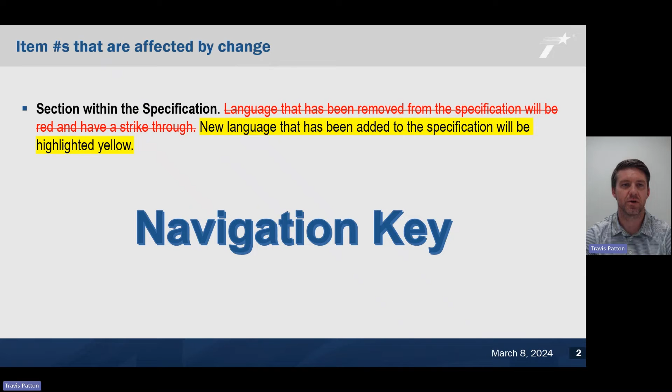So anytime during this presentation or during your plan review, if you need to go back and look at this, refer back to this navigation key if you're unsure what each of those stands for.

So to get started, item 341, 344, 346, and 347, as noted at the top. You'll notice in the fine aggregates table, the first thing I'll point out is organic impurities has been added to this table. This is not a new addition; it's something that's been listed under the fine aggregates portion in the paragraph directly above this.

Industry did ask in our conversations that we just add it to the table for quick reference. Do note that this is an optional test, so nothing has changed. We've simply added it to the table to make it easy to reference.

One change we did make, if you can see over here, there's a footnote 3 on sand equivalent. We've done this to add an optional methylene blue test.

The reason we've done this: historically we had the sand equivalent on the combined fine aggregate, and we didn't have as many materials failing. However, in the special specifications we're currently under, we changed the specification such that we run the sand equivalent on individual fine aggregates. What that resulted in is you no longer have this dilution effect between different amounts of material, and so we've seen some materials fail.

A really good example of this: there's a really good Class A material here in Central Texas that we were not able to use because it failed sand equivalent, which is an indication meaning that it's dirty. However, when we ran methylene blue, it came out to a methylene blue value of 2, which would mean the fine particles causing it to fail sand equivalent were in fact not reactive, meaning they're not clay. So we still feel this is a benefit to use this material.

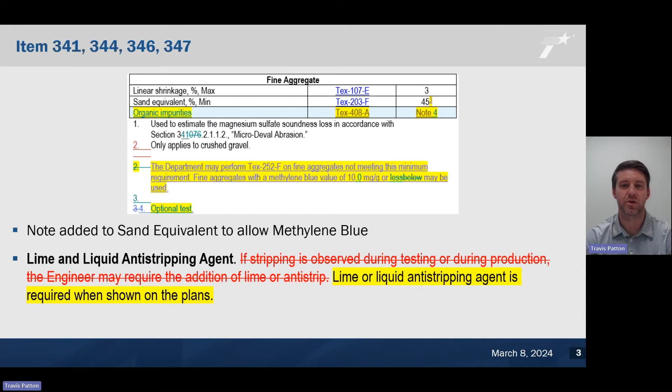So if you're in a district that routinely sees stripping, or you like the requirement of requiring lime, put that on your plans up front so the industry knows how to bid for the project. That way you ensure you also get the lime or liquid anti-strip.

If you don't pay attention to any other slides, I would say this slide and the next slide are probably the most important. It doesn't look like a lot of changes, but I'll explain why this change is going to be very impactful if you're not paying attention.

This will apply to item 341, 344, and 346. It says surface, intermediate, and base mixes referenced in Table 4 and 5 are defined as follows. That was the existing language. We have added 'unless otherwise shown on the plans.' The reason we've done this is we have changed the surface definition, which will impact your recycled amounts and your binder grade substitution. So you can write on the plans to define surface, intermediate, and base differently than what you see here, or you can write in your general notes exactly the amount of recycle or no binder grade substitution.

That is also allowable. Under surface definition, you'll notice it says the final HMA lift placed at the top of the pavement structure. Historically, it said 'or placed directly below mixtures produced in accordance with,' and that's seal coat, PFC, TOM, and thin bonded. The original intent with that language was that those four materials are not added for structural purposes. They're very, very thin, and a few of them are even permeable. So that layer directly below them is still experiencing very high stresses, very high strains, and they also are potentially still interacting with the environment above.

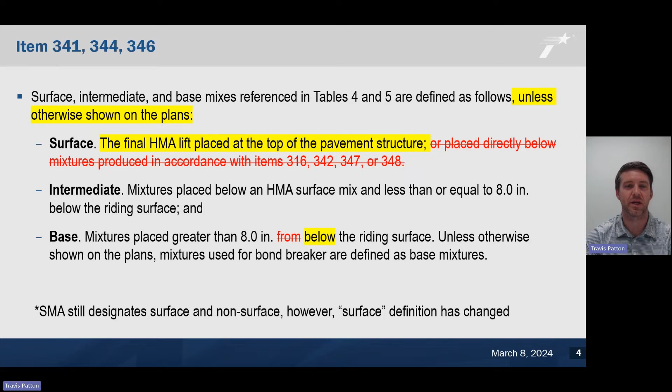And so the implications here -- if you look at Table 4, this is for item 341 because we have some other changes to talk about. But under item 341, if you were a surface mix, historically, that Superpave CCAT with a TOM on top is still considered surface. Therefore, you would be allowed 15% fractionated RAP.

Under the new specification, you are now considered intermediate because you're not the physical riding surface, which means you would go from 15%. And in terms of item 341, that's actually going to increase all the way up to 30%. So you're going to double the amount of allowable RAP within your material just based on that definition.

The other implication is we said no polymer binder grade dumps, which would mean a 76 can go to a 7022 because they both still have polymer. However, if you specify a 7022 in the surface, you could not dump to a 6422 in the surface because it does not have polymer.

And so what you'll see now is that Superpave CCAT or that dense graded CCAT we previously talked about -- if you specified a 7022 and it's got a TOM on top, you will be getting a 6422 because it's just the most cost-effective binder for the bidding.

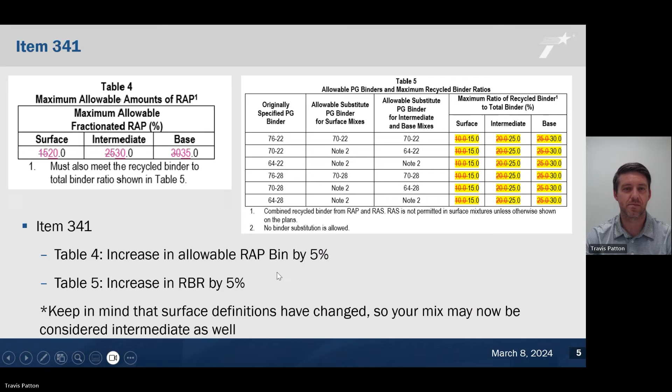Item 341 and 347, we put this in here just to be very transparent so everybody is aware. The TGC has effectively been removed from the 2024 specifications. So if your item 347, it's probably a bigger issue than the dense graded—I believe most districts had already switched over to the SGC. But no, there is no note in there anymore that allows you to pick the TGC as a compactor.

For item 347, prior to making this change, I did meet with the level 2 committee—that's all of the level 2 designers throughout the state. And I got them to run their current TOM mix designs that were designed on TGCs, and run them on the SGC to make sure it was doable. We did not have any issues, so I don't think there will be any problems. If you haven't done it, you may have to do some tweaking with your design slightly, but we have validated that this procedure should work for the designing of item 347.

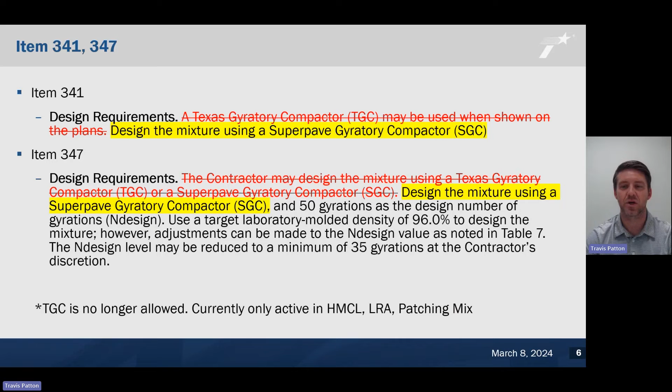I'll point out, I did say TGC is no longer allowed. Keep in mind that it is still in item 334 and item 330, which is hot mix cold laid and LRA, and it's also in our patching mix. We recently had some research through TTI where we've designed the hot mix cold laid on the super pave, and we've used the Ideal RT instead of the Hveem stabilometer. We're now trying to incorporate that into LRA and patching mix while we're also validating the hot mix cold laid. So we hope to have a special spec sometime within the next few years for hot mix cold laid and LRA, and then switch all of our patching mix over so we can effectively get rid of the TGC 100%.

So item 342, 344, 346, 347, and 348—just to do all the similar ones first—we have removed PFC crumb rubber, we've removed SMARC, and we've removed the thin bonded PFC. We really did that because I queried the usage of those materials over the past 10 years, and those combined had a total of 5 projects. So not being used, we decided let's simplify the specification. Let's remove the option, and let's just simplify and thin out our spec book.

We have kept SMARF—if you're a user, Odessa, I know, uses a lot of SMARF, we have kept that. Item 344, we've removed the restricted zone or reference zone. Historically, when the super pave design method first came about, the concept was if you went through this area, you would create a tender material that would have a tendency to push during the compaction phase. Under our current 340, or our current 3077, you'll note that we have a restriction on the number 8 sieve, which forces you into a particular curve, shape of a curve on the gradation. So if you do that, we've noticed that if you go above, below, or through the restricted zone, there's really not an issue anymore because we have already built in some structure just based on the gradation limits. So we've removed this—it's caused confusion in the past as to, is it restricted? Is it reference? What does this really mean? So we have removed that.

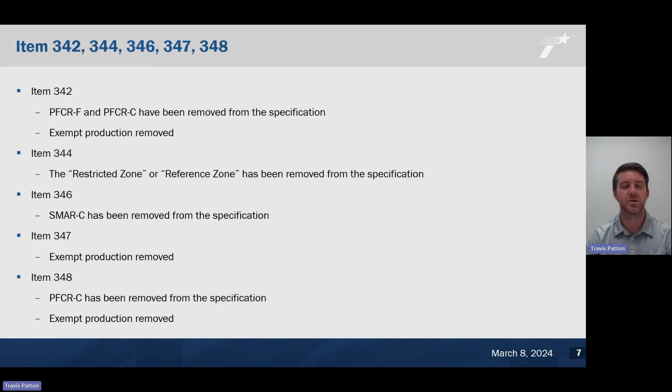Exempt production for 342, 347, and 348—we've removed that. Under the 2014 specifications there was no exempt production. In dealing with industry for the current special specs, they had requested to add it just for uniformity across our specifications. However, looking at this further, we noticed that there's already no placement testing for any of these materials—you're already getting a 1 or a 0. There are no pay factors associated. So really, what is the exempt production doing for you since you already have limited testing and you only get a 1 or a 0?

Item 346 and 347. The black language has already been here. That is the language stating that you can use a Hamburg wheel on the department's MPL. The yellow is just to point out that we're going to create an MPL for the overlay test.

Historically, TxDOT MTD was the only laboratory that could run this test. We are going to create an MPL similar to the Hamburg wheel test in which other people can run it as well. I know we have about 10 machines, 2 others being TxDOT districts. So we hope to get this done. We'll create a proficiency very similar, and then we will create an MPL that you can choose from similar to the Hamburg.

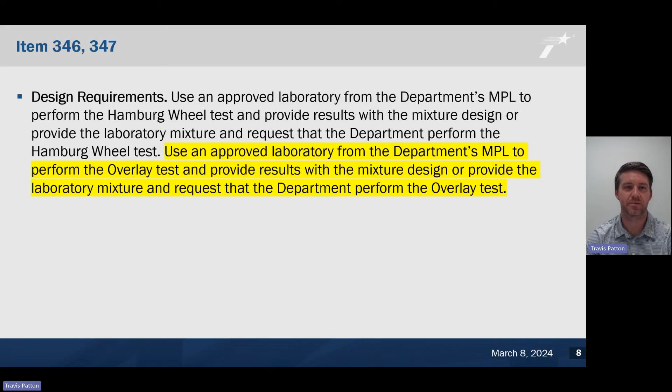We have changed that to just say the minimum rut depth will be 2.5 millimeters. This was a request by industry. So once again, if a contractor is producing material for both the Austin district and the San Antonio district, the San Antonio district may require the contractor to do something about that 3 millimeters, whereas the Austin district may not.

And so once again, the contractor is going in somewhat blind as to what the district will require. You'll note that it used to say we'll lower the design SGC to 35 gyrations. And so the issue there is, yes, when you lower to 35 gyrations, you're increasing the virgin binder content because you're adding less compactive effort. Therefore, you would increase the minimum rut depth.

Well, that additional 0.2 of binder is also a cost incurrence to the contractor. So we have removed it and just said that you will have a minimum rut depth of 2.5 millimeters. However, we're not going to specify how they will fix that. So if that means gyrations, that's one option. Adding some binder could be another option. Adjusting the gradation could be another option. So they do have additional options to get to that minimum rut depth without us specifying.

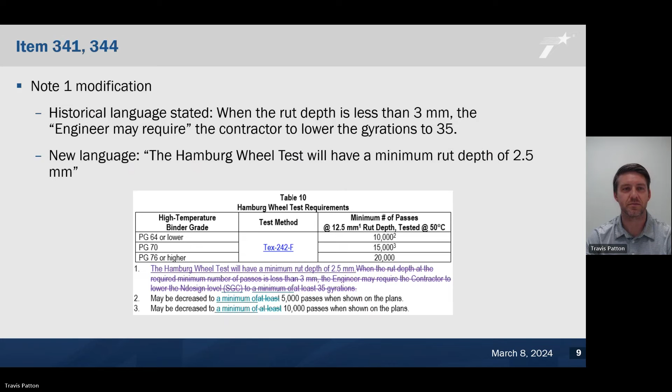Item 341, 342, 344, 46, 47, and 48. This has been a conversation for at least the past 10 years: when does 10 days start? We've always kind of avoided this just because it's difficult to not put stipulations on somebody, and maybe some stipulations that are very, very difficult to achieve. So we have now specified that the engineer will be allowed 10 working days upon receiving the sample from the contractor.

The key here is, historically, the district would get the sample from the contractor. The district says, well, I've got 10 days to do it. Maybe they need to ship it to MTD. MTD gets it, and we say, well, we've got 10 days to do it. So from the contractor's perspective, this may have taken 20 days. And that's not really what the intent was.

The intent is to get it done as quick as possible. However, giving 10 days does give you additional time in case you need it. The overlay, for example, will take 5 to 7 days if everything goes perfect. So if you're in the district and you need MTD to provide some level of testing, overlay for example, the second you get it from the contractor, you need to ship it over to MTD.

That way, when we get it, due to shipping delays, whatever type of delays are built in, it'll take us 5 to 7 days. So if everything goes perfect, we'll already be pushing that limit to 10 total days to the contractor. So please don't let it sit in your warehouse. If you're shipping to MTD, or if you're in the area office providing it to the district lab, please get it to your district lab very quickly, because this is something we would like to try to adhere to: the 10 working days.

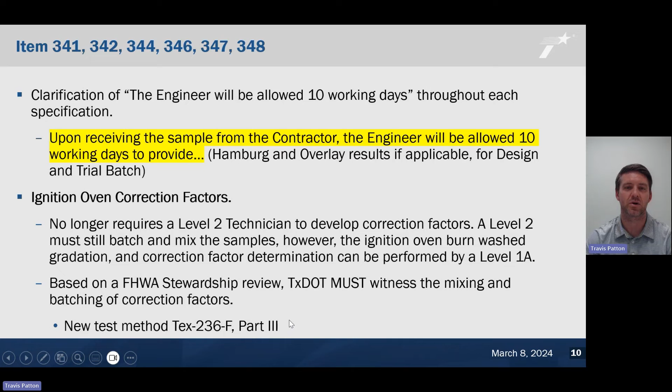To do this, we're going to add a new test procedure called TX236 Part 3. It's going to be witnessing the mixing and batching of correction factors. That will be a certification level offered through 1A, and we will also certify that through an MTD standalone certification through our class marker program.

Once again, this was an FHWA stewardship review. There are no options to not perform this. This is something that we need to do for federal compliance.

We did try to break this down to be a little easier to read, so the contractor knows their job duties and the engineer knows their job duties. For the contractor, we say notify the engineer prior to performing TX236 Part 2, which is the correction factors. Allow the engineer to witness the mixing of ignition oven correction factor samples.

Now, if you're the contractor, I would say, have a plan up front. If this means rain days, or, hey, 3 months out, I plan on doing this because we do these every 12 months, they need to communicate that with TxDOT.

And from TxDOT, you need to be on notice that if there's a rain event or something, when they said that they would run those correction factors, I would try to get out there to do that. If you cannot do that, you'll have to mix your own.

So it says, if the engineer witnesses the mixing of the ignition oven correction factors, provide the engineer with identically prepared samples of the mixtures. It did say split, and there is a distinction here that I'd like to point out.

So split means I'm going to batch up 4,000 grams. I'm going to mix the whole thing with 5% asphalt, and then I'm going to give 2,000 to TxDOT, and I'm going to give 2,000 to the contractor.

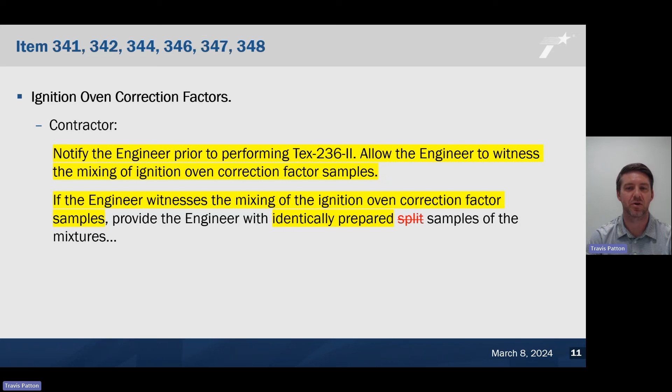Ignition oven correction factors. So the engineer can determine correction factors by one of the following ways. Witness - we just mentioned that. You would witness the mixing by the contractor and then take your sample back to your lab and run those correction factors on your own ignition oven.

The other option is if the engineer does not witness or cannot witness, the engineer will prepare the samples themselves, and that means batching and mixing. So in order to do batching and mixing, you still must be level 2. If you need to do that, you'll have to have a level 2 within your laboratory that can mix and batch, and then the level 1A can then run the ignition oven correction factors and the wash gradation on your own setup within your laboratory.

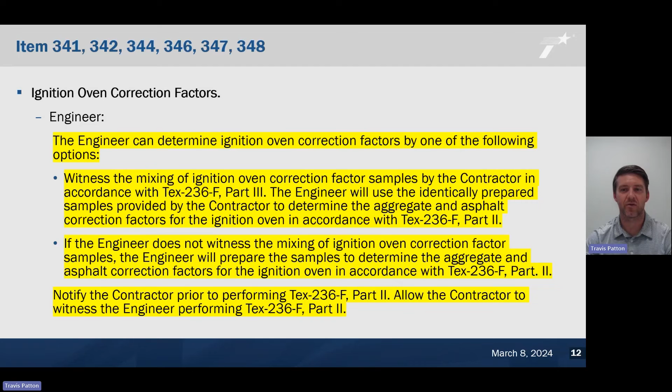Industry did ask that we allow them to come and watch us run these correction factors if requested. I don't think this is going to be something that happens a lot. This will probably be the first few times, just to make sure everybody knows what they're doing and everybody's doing it the same way. After that, I wouldn't expect to see that happen a lot.

Approval of Lot 1 production.

This note that we added says current JMF changes that exceed the operational tolerances may require a new lab mix design, trial batch, or both. I think the key here is JMF changes. This is not saying that if you're operating with a 3/10 tolerance on the asphalt content and you hit 4/10, that this is going to require a new lab mix design. That's not what this is stating.

This is stating that if you're doing that and consistently getting lower asphalt, your densities are checking out, you're still within the design requirements, you've verified all the performance tests and everything looks good, and we say, I don't know why, but I need to back out or add asphalt or an aggregate sieve outside of the tolerances allowed within Table 9, and you're going to enact a JMF change, meaning adopting a new plant design, that may require a new lab mix design, a trial batch, or both.

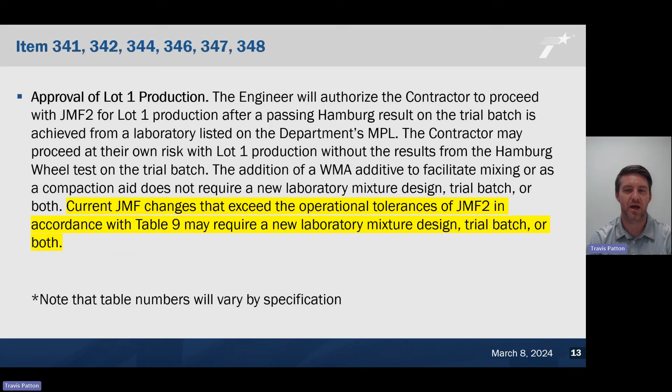I think that's going to come down to engineering judgment. If this is, say, a 3/8 sieve, maybe that JMF change is warranted, but maybe it doesn't really change the overall performance of the material. If that's an asphalt content, maybe that would warrant at least a trial batch and a Hamburg, maybe a partial lab mix design. So that'll really come down to engineering judgment at that point.

Production operations. We've always had some language that alluded to some of this, but it wasn't very clear. We were aware of a few scenarios this last year that were not okay. So we've put in these two highlighted portions that say all asphalt source changes will require a passing Hamburg result from a laboratory listed on the department's MPL.

The key here is if you're doing a project and it's got a PG 7622 and it's failing and you don't know why it's failing, and then you change that PG 7622 to a different source and it's still that same PG 7622, and all of a sudden it passes. We've seen this time and again during forensics. So what we're saying is the opposite could also be true.

So you have an approved design, everything's working, you're using an approved binder, you've got passing Hamburg results. All of a sudden the contractor gets a cheaper binder from a different source and brings it in. You could go from a passing Hamburg to a failing Hamburg. We've got the binder sampling program for a reason - really, it's to document the performance of these binders, and if they start failing, we can link projects together.

So this is no different. If you change sources, just note that you did the source change and then have a passing Hamburg result to associate it, just to make sure that the changing of that binder source is not negatively affecting the performance of your material. On the other hand, here we have: all aggregate source changes will require a new lab mix design and trial batch.

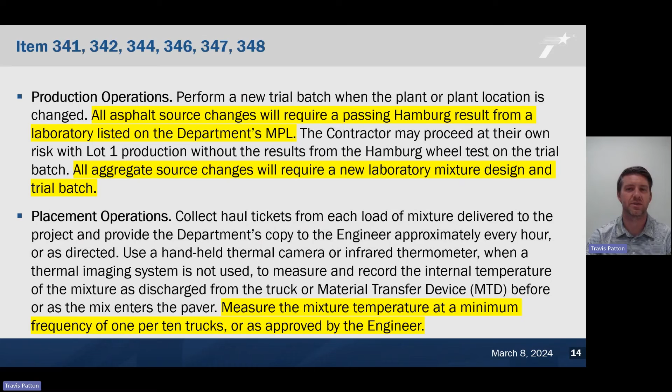Weather conditions. This is pretty confusing within the current special specifications. We were asked originally to reword it, so we went through to reword it. Upon further discussions with industry, they asked us to just remove it. If you're a district that needs this note in here, I'd say put this in as a general note, call MTD, we'd be more than happy to talk to you about what the intent of this note was and help you come up with that note.

Really, one of the problems with it was the misinterpretation of the language. Is it that the ambient temperature is likely to drop below 32F after 12 hours of paving, or is it if it's likely to drop below 32 within 12 hours before I am paving? There were 2 interpretations, and one interpretation may help you more. Also, 12 hours may not work for your district, right? Maybe it's 8 hours, maybe it's 4 hours. So aside from the really cold districts up in the Panhandle, this may not even apply to you. We were asked to simply make this a general note, and let the districts that need it specify it accordingly.

Compaction: complete all compaction operations with breakdown rollers before the pavement temperature drops below 180 degrees Fahrenheit. Historically this would have said complete all pavement operations by 160 degrees Fahrenheit, but it also states you can open it up to traffic at that point. I'm very confident a contractor can get density down to 160 degrees Fahrenheit with a large enough breakdown roller. That is not the intent. We do not want to just fracture aggregates and fill all of those voids with aggregate dust. That is not the same as quality density, right? We're trying to say that when we get density, we want those voids filled with asphalt. We want consolidated material, not crushed material. So we've now specified breakdown rollers will be off the pavement by 180, between 180 and 160.

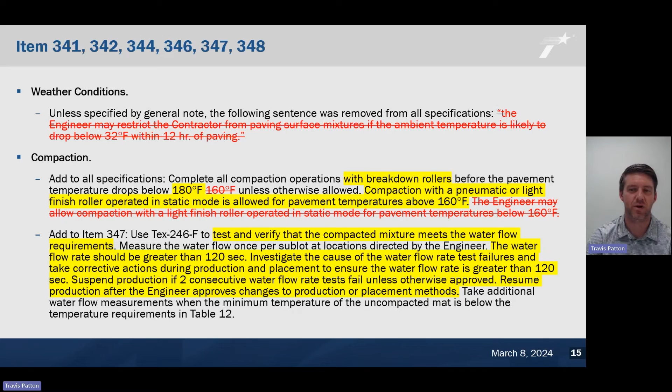In item 347, we've added the permeability flow test. Also, this is not an addition, this is something that was already in the test procedure. So Tex 246, if you read it, would tell you how to perform this, and it had a specification item within the test procedure that said the time should be at least 120 seconds or greater, meaning that it's not permeable. Well, that's not really the spot to put it within a test procedure, so we've removed that language from the test procedure and put it into item 347. Once again, this is not a new requirement, it's just being added into the specification where it should have been from the induction of the test.

Note 3 was modified here to allow 20 degrees delta instead of 10 degrees. Prior to this, the language would say you are allowed 10 degrees lower than this table if you were utilizing warm mix asphalt as a compaction aid. Now we've increased that to 20 degrees, and we've also added an MTD with remixing capabilities, as well as a paver hopper insert with remixing capabilities.

Really, the intent here is we want uniform temperatures throughout the material. When you start getting colder temperatures, you're going to start finding cold spots within the material itself, and some areas may compact better than others. A warm mix additive helps with uniform temperature and with staying workable at lower temperatures, so you can still get compaction. The other two options keep uniform temperature through remixing—that's the key here, the remixing. So by keeping uniform temperatures, we allow 20 degrees lower, knowing we're not going to have these localized cold spots.

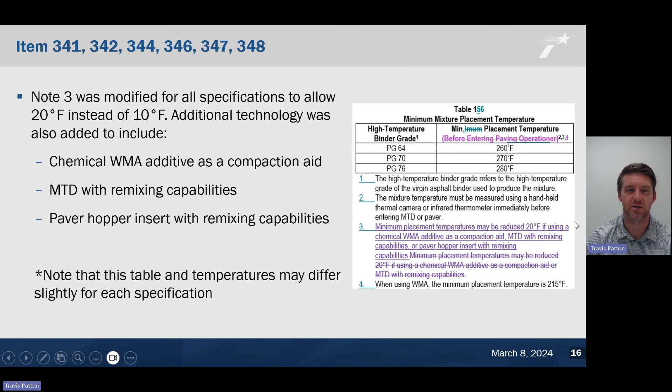Production sampling: the engineer will perform or witness the sampling of production sublots. This isn't something new, just something we needed to clarify. I realize some contractors won't let TxDOT get in the back of a truck to sample loose material, so in that case the engineer will witness. Either the engineer needs to be on the sampling platform sampling from the backs of these trucks during production, or they need to witness the contractor doing it. When the contractor does it, or when TxDOT does it, you'll grab enough material to combine together and split into 3 equal portions—one each for the contractor, the engineer, and referee.

Blind sample—this also isn't something new. This is something we added or clarified based on an FHWA stewardship review. FHWA met with MTD and asked our interpretation of this part of the specification, then asked a number of districts, and unfortunately got a bunch of different answers. So we were given 2 options. One is TxDOT goes to 100% blind sampling, meaning the contractor never knows the production location and TxDOT just samples random trucks. Option 2 was to do it as we currently are, where the contractor can have the production random locations and calls TxDOT to say, this is when we're sampling, meet me at the sampling location.

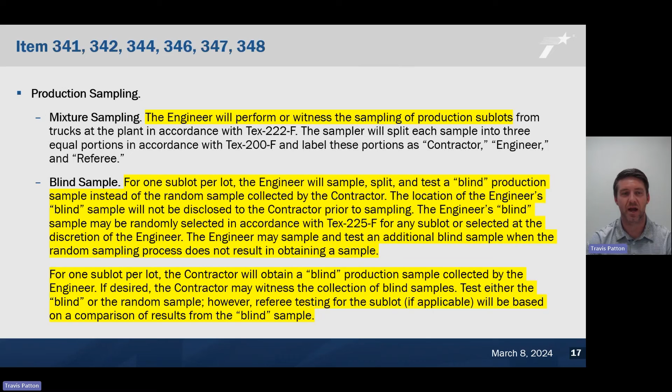We would then follow the same protocol, splitting for contractor, engineer, and referee, noting that any referee test will be based on the blind sample for that given sublot. So if you get a blind sample and a random sample in sublot 3 and it goes to referee, it's based on the blind sample. So if you're the contractor, you don't need to test that random sample for that sublot—you'd be testing the blind sample. Everybody's testing the same material in this case.

Hamburg wheel test—unfortunately this is something brought to us by industry. There were fears this had been abused throughout the state in particular districts. You've got a 1 minimum production testing Hamburg per project, and you get to the end of the project and realize you never ran your production Hamburg. So you ask, what do I do to clear the site manager deficiency? They'd go take a core and run Hamburg, and that would suffice as the test. That's not really the intent of this. This was really meant more as a forensic tool, for when we've already got failing Hamburg productions or noticed issues on the roadway, like failing rutting.

And so we would take cores and run the Hamburg wheel test on that as well to determine the severity of the rutting. Due to this being misused, we have removed this from the specification. So Hamburg will be based on plant-produced mix, so loose mix. If you're the district, take additional material at the time of production sampling if you know you're going to run a Hamburg. Otherwise, the Hamburg would be run on a referee bag. The problem with that is if you need that referee bag for another reason, such as a density referee, you won't have that material to reference back to.

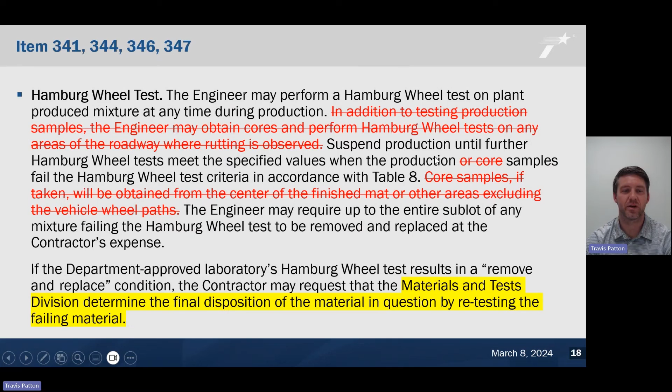Miscellaneous areas - this is another one of those larger changes. If you're not paying attention, it could be confusing. So under item 351, which is flexible pavement repair, it points to, or it historically pointed to, item 340, which was our small quantity hot mix specification. And so you would go to item 340 and then produce and lay material in accordance with item 340. Past few years, we did discontinue item 340. And so now if you read item 351, which is the flexible pavement repair, it'll point you to exempt production within item 341 or 344.

The problem is when you get pointed to exempt production, there is a higher level of testing associated with exempt production. So to remedy this, we have added some language both under the miscellaneous section within the specifications and the exempt production. So what this does, now we say if the pavement repair section is under 300 linear feet, it'll point you back to miscellaneous within the specification. Miscellaneous has limited testing, with a 1.0 or a 0 type pay scale and very limited testing. The idea there is, if this pavement repair section is 20 foot, is that really fair to call that exempt production when you can't really even get a paver on it to get consistent placement? So if it's over 300 linear feet, what we say is it is going to be exempt production because there's no reason you can't get a paver on it and just pave it as you normally would. And so we felt that this was fair.

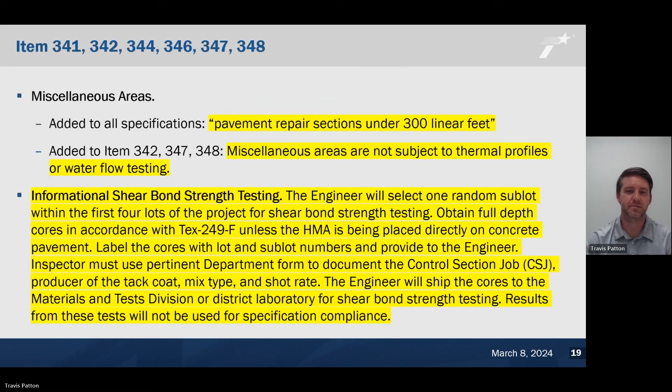Segregation density profile, nothing has actually changed here. I only put it here because there has been some misinterpretation of what this table means. So table 17 here, the segregation density profile only applies if you are not using the paver mounted thermal imaging system. If you're using a handheld, this applies to you. If you're using the paver system, this does not even apply.

So when using the handheld, we also wanted to clarify the reasons when you would run a segregation density profile. One is areas identified by the contractor or engineer with severe thermal segregation, currently in the specification. Any visibly segregated areas, also currently in the specification.

And then we clarified this last bullet where it says the paver stops due to lack of material being delivered to the paving operation, and the temperature of the uncompacted mat before initial breakdown rolling is less than the temperatures in table 17. The distinction here is that we're trying to prevent a paver stopping because maybe there's a trucking delay or something like that. So they have no material coming in, they've stopped the paver, and the roller operator is 100 yards back and not able to get compaction up to the paver because the paver has not moved. There's not adequate room, maybe the paver operator is having breakfast, smoking a cigarette. Really the intent here is that we don't want that material directly behind the paver that has seen zero breakdown rolling to drop to a threshold where we're no longer going to be able to get density.

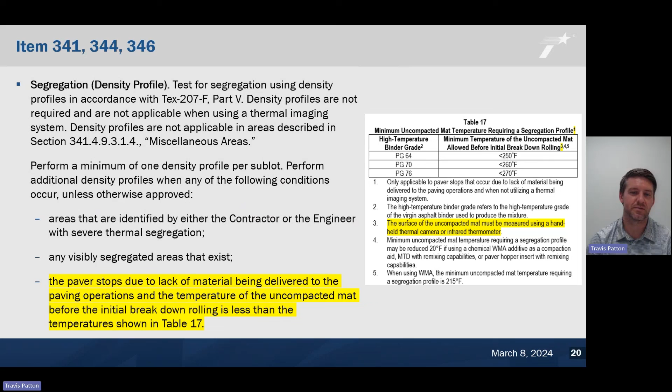What could they have done better? Well, the next day you could have communicated and said maybe we just need to open a 2,000 ton lot, and we either get 2,000 tons, or maybe we only finish at 1,700 and you close the lot out. That probably would have been a better solution. For that one day, would it have made sense to say, let's do exempt production just today, and then tomorrow we'll establish a better lot size? Yeah, maybe that would have been okay. But that's where that mutually agreed upon between the contractor and engineer comes in, because what ended up happening with that project that had over 100 lots of exempt production was the contractor essentially lost out on all of the bonus opportunity.

We've also added pavement repair sections equal or greater than 300 feet. I've recently talked about this in miscellaneous. So under 300 feet, it's still miscellaneous. Greater than 300 feet, it'll be exempt. This is in reference to flexible pavement repair, which is item 351.